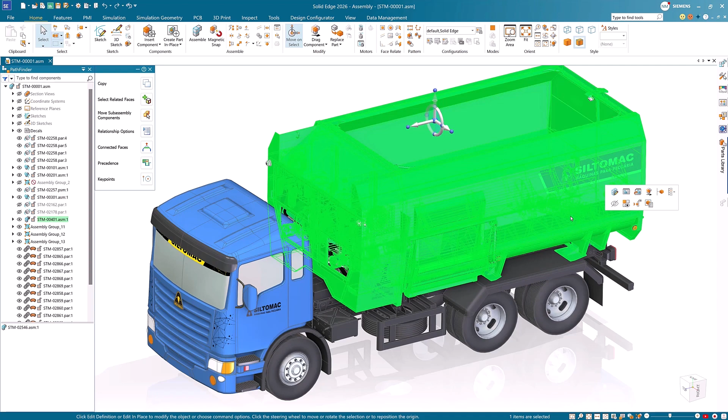Design clearly and confidently at any scale with Designcenter Solid Edge. With significant improvements for part and assembly workflows, managing complex assemblies just got easier. Let's start with magnetic snap assembly.

This new artificial intelligence-powered command automatically identifies and assigns the right mates based on nearby surfaces or edges. This eliminates the need to manually assign constraints, as Designcenter Solid Edge intelligently recognizes the correct relationships as you drag parts into place, making assembly creation faster and more intuitive.

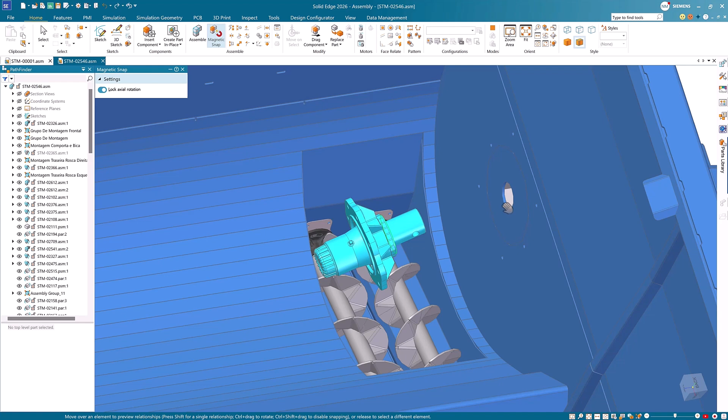In this example, we're missing an auger and its base. As we bring in these components, we'll use magnetic snap assembly instead of flash fit. Dragging the edge of the base to the hole automatically applies both a planar and an axial constraint in just one move. We can then bring in the auger subassembly and constrain it in the same way with a single drag and snap motion.

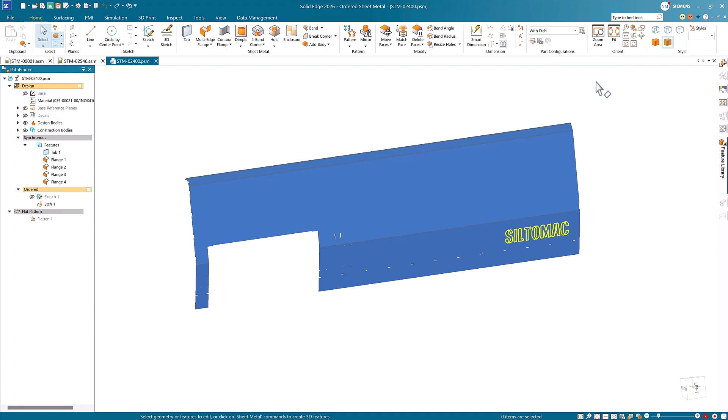Part display configurations are more powerful than ever. You can create multiple visual variations of parts and assemblies customized for different needs within a single document without duplicating files. Here we have 3 configurations, one showing just the etch, one showing just the sketch, and one with a decal added. Toggle elements on and off to build new configurations with just a few clicks, all without altering geometry.

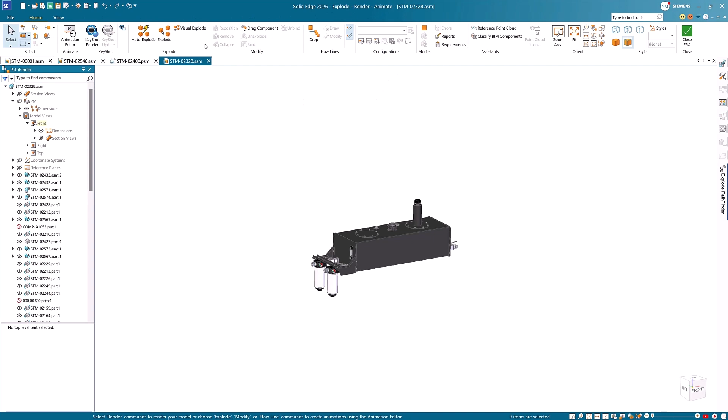The improved visual explode command brings new clarity to design communication. Exploded views can now be saved as display configurations, so once you build it, you can reuse it anywhere, whether that's for documentation, presentations, or just clearer communication with your team.

It's a cleaner way to show how parts come together or come apart without having to redo the work each time. You can also select a specific part display configuration for the entire assembly. For this side panel, we'll switch the default configuration to the one with a decal.

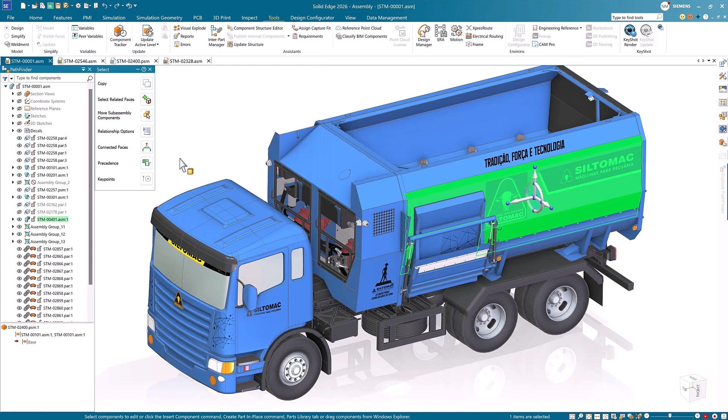With Enhanced Part Copy, you can include geometric elements such as coordinate systems, sketches, and reference planes in your part copies. In this assembly, we're missing a side panel. Instead of starting from scratch, we'll create a mirrored part copy of the existing panel on the right.

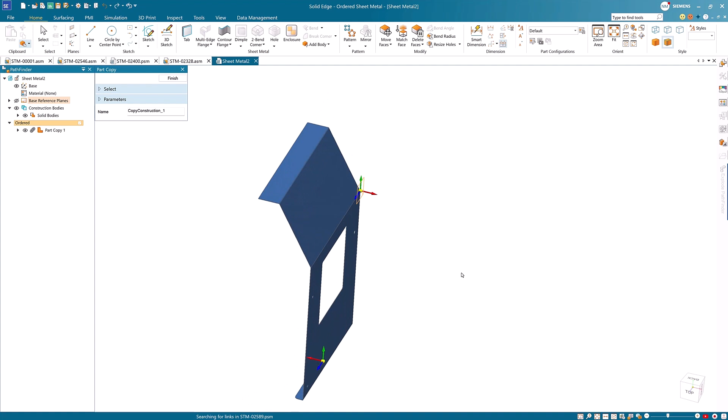As we do this, we can capture the coordinate systems, sketches, and reference planes while copying the panel as a construction body. Once created, we can save this mirrored part copy and bring it into the main assembly. By activating the reference coordinate system of the part it will attach to, we can then use match coordinate systems to assemble the new part directly in place.

Part copies are associative, so when the original part changes, the copy updates automatically as well, maintaining specified parameters and keeping everything aligned.

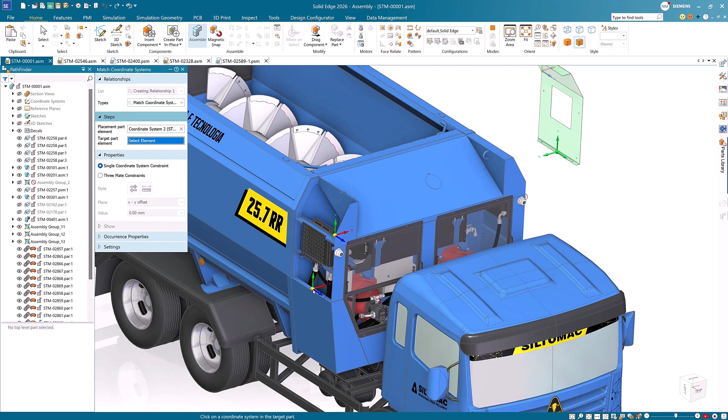Designcenter Solid Edge delivers greater flexibility and control, helping you work faster and more effectively from concept to completion. With intelligent automation, improved visualization, and stronger reuse capabilities, you can focus more on innovation and less on the process.